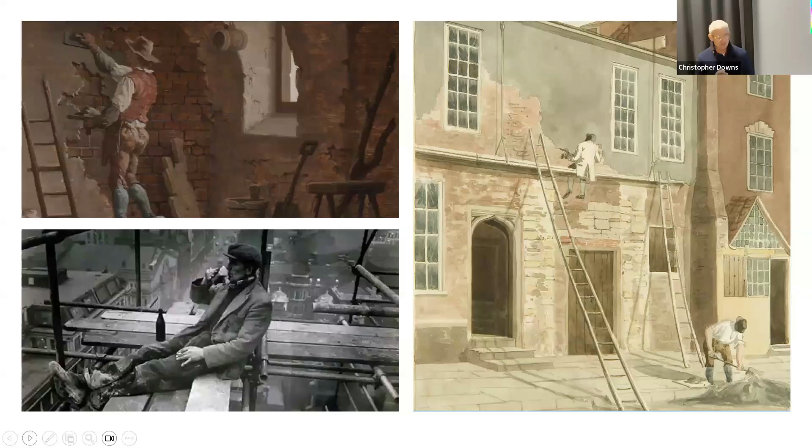Disappointingly, I've all the imagination of the field vole. I'm only interested in the facts and how the data stacks up, and this is at the core of my talk to you today. I stand before you as an academic tradesman, which for all our lack of safety, undisciplined approach, our filth, our mess, our drunkenness, and cheers by the way, we still managed to produce the mason architects of the past. Men like Palladio, John Mylne, William Adam, and the much underrated James Smith, men who understood the relationship between form and function in all its detail.

The problem is twofold. Conservation has come to mean pointing, and the process has accrued values that are unsustainable now and in a climate-changed future. And within the canon of pointing, the process is one-dimensional, a single universal style throughout the country.

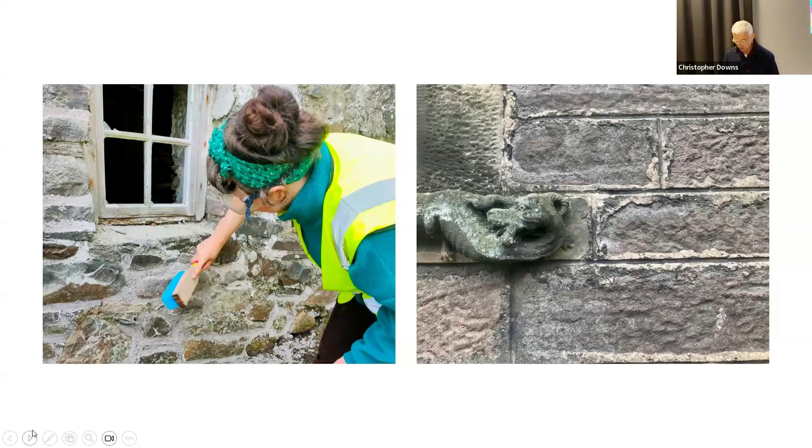Polymath Mary Somerville was a chemist, astronomer, and core figure in the Scottish Enlightenment. She's been described as certainly the most extraordinary woman in Europe, a mathematician of the very, very first rank. Her book, The Mechanism of the Heavens, was the set text for undergraduates at Cambridge, and her work on the connection of the physical sciences was only surpassed by Darwin's Origin of Species, and her efforts translating algebra into common language remains a hallmark of mathematical dissection.

Florence Nightingale is best remembered for her pioneering nursing work in the Crimean War. She was able to achieve this with her understanding of training, sanitary care, and crucially, statistics. With the use of data visualization and the polar area diagram, she was able to demonstrate that severe trauma did not inevitably lead to death, and the concept of professional nursing was the lasting outcome.

Both women used empirical observations to develop methodologies that in turn tested a hypothesis. They processed data, and the results confirmed or rejected the hypothesis. Only then could a conclusion be established. Once the results were scrutinized by a wider community, change was initiated.

The language of Ruskin and the SPAB plays a part in restraining the heritage industry from analysis, because it's an attractive outsourcing of the critical acumen of a comfortable and frankly lazy audience. In The Stones of Venice, Ruskin uses the term exquisite 24 times, while in The Seven Lamps, precious is similarly overworked. The language of heritage is directed at a particular social and economic group who are articulate and know how to generate support. So, for example, 'this darling little jewel of a building must be saved for the nation' will turn the hearts of many, and they can do so without defining who that nation is. It certainly isn't my family.

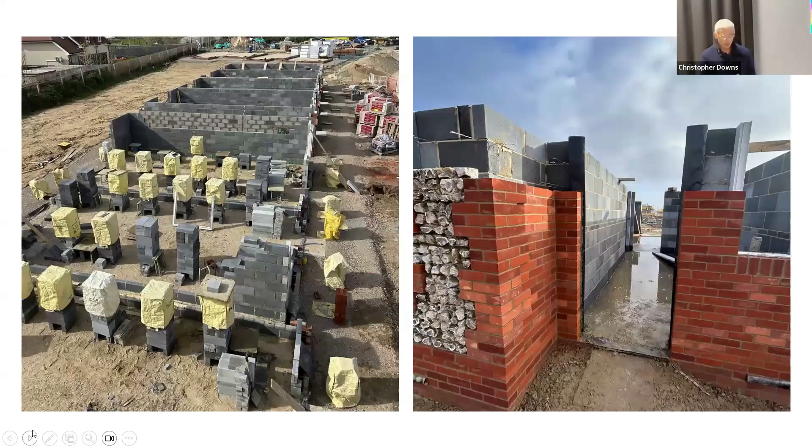This well-ordered contemporary building site presents the bricklayers and their work in a highly professional way. The unspoken truth of knowing how to get things done efficiently and well has intangible heritage writ large. They are bricklayers, not heritage bricklayers, lime plasterers, or building conservators. Adding such pronouns and post-nominals adds 30% to the cost and switches hard hats and boots for berets and cravats.

If you can't build a house from footings to DPC and from there to eaves and gable, and do it with alacrity, how can you be expected to understand the role of brickwork at Hampton Court? The transition in practice these lads and lasses would need to work in lime is tiny. The transition for many working in the heritage industry to the coherence of this site would be insurmountable.

The language of heritage portrays conservation as an art, but in reality it's professional building work, or at least it should be. My friend Peter Berman makes an interesting point: Ruskin is more read about than read, and the heritage industry just soaks up the highlights and spits them back out, waiting for the applause.

In The Seven Lamps, Ruskin is forthright: the true colours of architecture are those of natural stone. This doesn't actually stand up to scrutiny. Surely the true colours of architecture are whatever cultural, political, religious and environmental constraints there are at any given time.

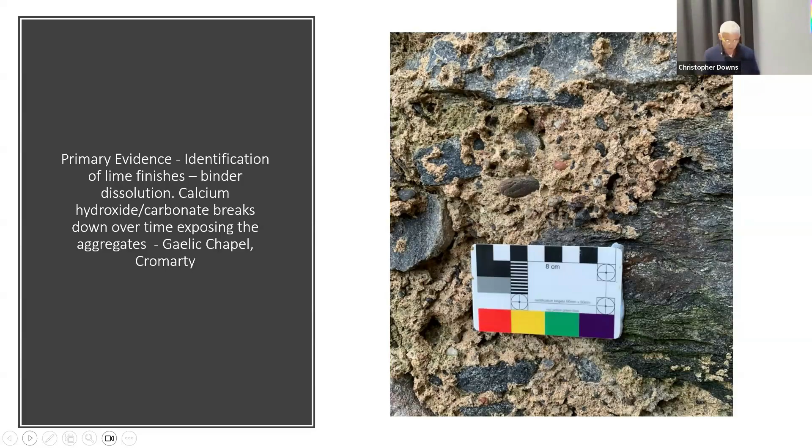The physical evidence was divided into two groups, primary and secondary. In more detail, we looked at mortar colour. We looked at binder aggregate dissolution, meaning that the binder dissolves away from the aggregate, and the mortar friability, how well it crushed between our fingers. We looked at lime inclusions, those are the little white dots you can see in the mortar.

I want to turn to site selection and the impact of unforeseen observations. So let's return to St Clement's. A planned inspection, following a desk-based analysis with compelling results. So far, so good. More compelling, however, are previously unrecorded buildings en route.

So the bulk of the entries for the study aren't the planned observations at all, but the unforeseen. Let's not underestimate the value of drive-by archaeology. In this case, perched on a hillside, isolated and seen at a distance. By stopping and snooping, one can soon develop a more meaningful metric. The inclusion of unforeseen observations changed the study from formal, planned, localized investigation to large-scale, nationwide randomized survey.

I'm trying to highlight that there is no bias in the survey. We didn't focus on specific areas with prior knowledge, so I can't stress how important unforeseen observations are, but it was significant how few of the planned observations described finish in the listing, scheduling, or CANMORE descriptions. The frightening thing is that the survey was easy. The question for me is, why has nobody looked?

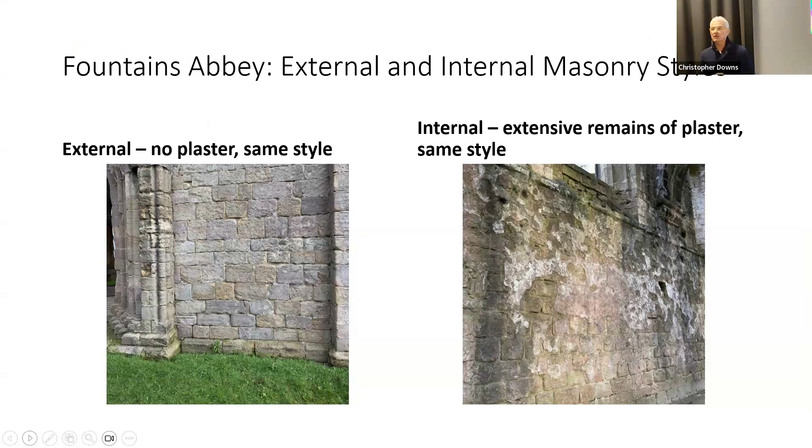But with closer scrutiny, that's a position which is increasingly difficult to substantiate. Once we understand the principles of traditional building practice and how and where to look for evidence, then we can apply the logic of backward induction. Can we then begin to reimagine not just plastered surfaces, but a polychromatic Scotland when Catholicism dominated the religious and secular world, now applied to the exterior of buildings?

Let's turn to the results of the survey. The evidence for much larger aggregates than we are currently using was compelling, but early examples of limewash fragmentary. The other crucial outcome of the survey was the identification of a relationship between wall building and finishing during construction, meaning the masonry was coated while it was being built rather than waiting till the structure was complete.

The process has implications for the robustness of finishes by creating the perfect conditions in which carbonation can take place. It also applies to the curing of hydraulic mortars. A relative humidity of between 40 and 80% over time. What is significant is the strength of the mortar at the joints and demonstrated by its long-term survival.

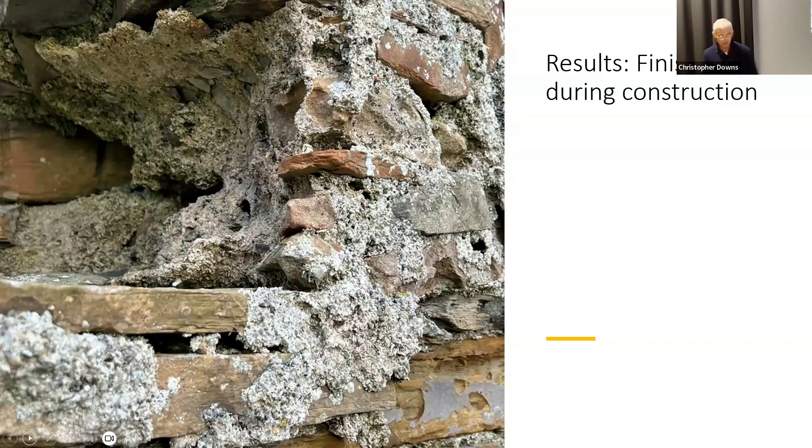But it also gives us an insight into the intangible heritage of masonry walling, a building process that was understood to be covered from the point of construction, hence William Adam's term for rubble work as rough work, meaning well built but intended to be obscured, much as roughing out timber work might be described, and my thanks to William Kay for that reference. Here you can see the relationship between bedding stone and finishing, where there is no separation between the two, and by that I mean there is no drying or carbonation front.

We identified several key features. Early harl was thick and applied as a single coat. There is some evidence for thinner lined out plasters also applied as a single coat. Floss Castle and Newhailes House, that's the building we saw earlier, spring to mind. At no point did we identify the process of harl or plaster applied as a multi-coat system.

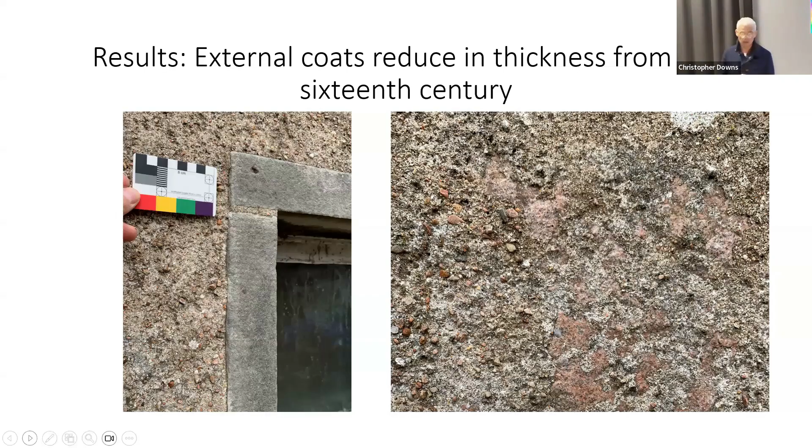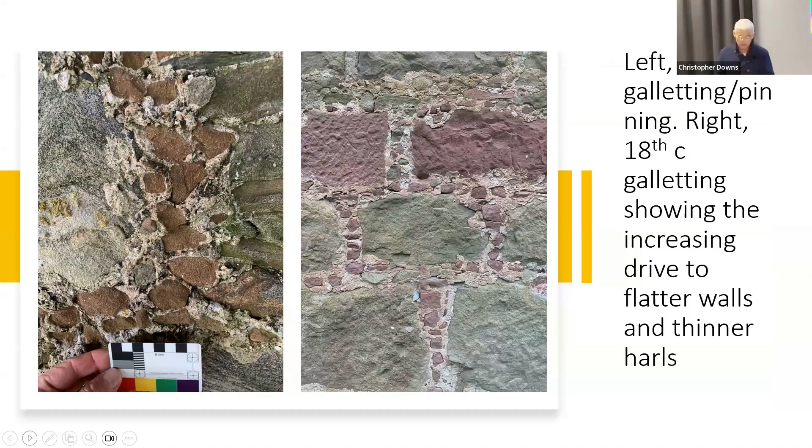By the early 18th century, harls in lowland and central belt areas reduced in thickness, and here you can see the raised margin. The harl sitting below the front face of the margin, so the shadow is cast by the margin and onto the harl and not the other way around. This was achieved by an increased refinement in pinning, galleting and snecking throughout the 17th and 18th century. Procedures that add robustness to the structure by helping resist torsion and increase compression, particularly in the perp joints, which don't have the same constant load as the horizontals.

It is my view, as a tradesman, that much of the vitriol and virtue signalling about binder type is superseded by the importance of packing the bejesus out of the joint. If we look at the timeline, we can see the wider impact this had on coat thickness. The depth of finish in the early examples is due to wear.

The reduction in coat thickness in the 16th and 17th centuries is relative to the refinement in Renaissance architecture when tower house building peaks. Coat thickness levels off during the 18th and 19th centuries and declines thereafter, which corresponds with the reduction in wall width in the same period. So, for clarity, the evidence tells us that as walls diminish in thickness, there is a corresponding diminution in the thickness of coats.

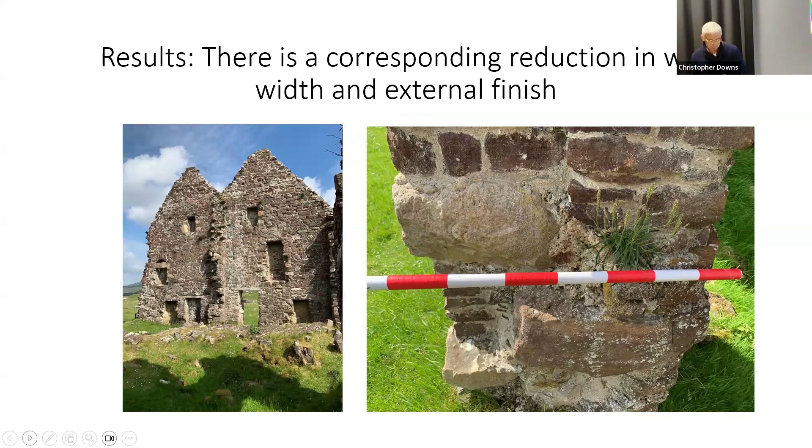But there's a secondary reduction in wall width in the area below the sill in domestic architecture, and it's worth bringing together the reasons why this happens. By the 17th century, neoclassicism was firmly established in tandem with the landscape garden. The Little Ice Age made the garden less accessible in northern Britain. However, the combined technologies of crown glass and the sliding sash window meant that the garden could be experienced from the interior of the building. This is only possible if the space is created within the window area to accommodate the mantua gown.

Again, to be clear, the evidence tells us that as lime coats become thinner, there is a reduction in wall width and a further diminution below the window in a residential building of the long 18th century. Finally, we identified that the use of limewash seems to peak in the 19th century and decline thereafter by a combination of factors, including no longer fashionable and removal. The poor representation of limewash in the earlier examples is likely to be removal in times of religious strife and wear bias. We simply cannot dismiss wear bias.

But can we begin to think about the anthropology of finishes? Because the data anomaly is at odds with the pictorial evidence from much of Europe, where plaster, colour wash, sgraffito are commonplace. It's significant that lime wash was used in strategic areas where the focus was at street level, and more specifically around doors and windows, a position substantiated by archive images.

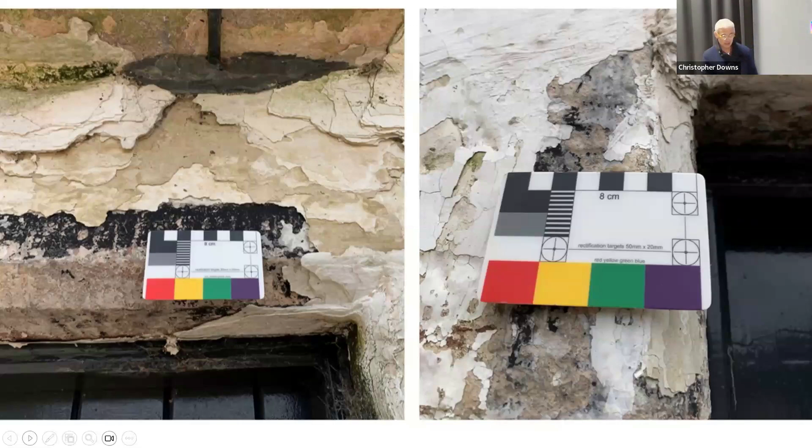The on-site archaeology showed the cyclical nature of rewashing, with multiple coats applied to cut details, folding around the chamfered margins and roll mouldings and into the window frames, leaving us with a sense of plaster and limewash used to manage external and internal environments by a process sometimes called hygral buffering, a process directly related to what my pal Robyn Pender calls thermal physiology.

Anyone who missed Robyn's irritatingly brilliant talk last Saturday should seek it out. Her central points being that in the past we were better at managing our internal environments to the betterment of personal physical comfort and well-being. You begin to get a better understanding of the cruciality of triangulated evidence, a methodology we have not previously been good at.

However, by the late 18th century, particularly in the central belt and urban areas, the dominant expression of architecture is bare stone. And thereafter, we see the arrival of rubble mania and what we now think of as pointing. We identified 16 different pointing styles, and several factors need to be considered. Firstly, the overwhelming commonality was formality achieved by lining out by pressing into the joint with a purpose-made tool while the mortar was green. Sometimes white lining was added. It might also mean dotting the joints with small shims of slate to create a black definition rather than white.

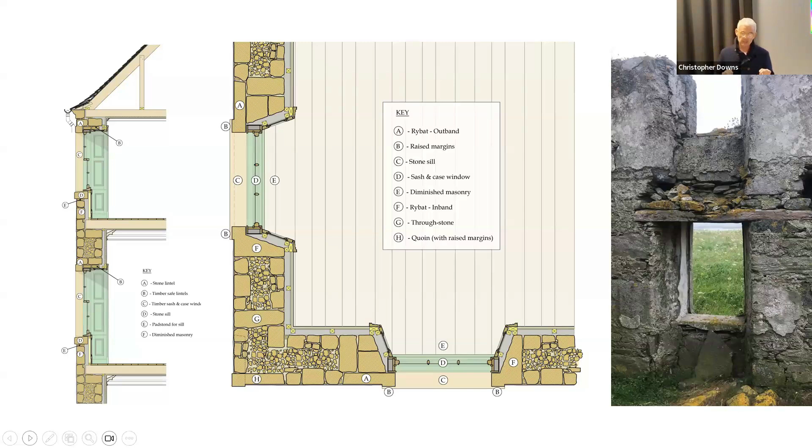Understanding how all the different elements of a building come together is crucial. So, by putting the elevations, sections, and plan together, we can understand wall morphology as a series of substantial piers, triangulated at the corners, and linked by insubstantial ties. That's the narrow bit underneath the windows. Externally, there are stone lintels with timber supports behind them, onto which the masonry is placed. This houses the floor joists.

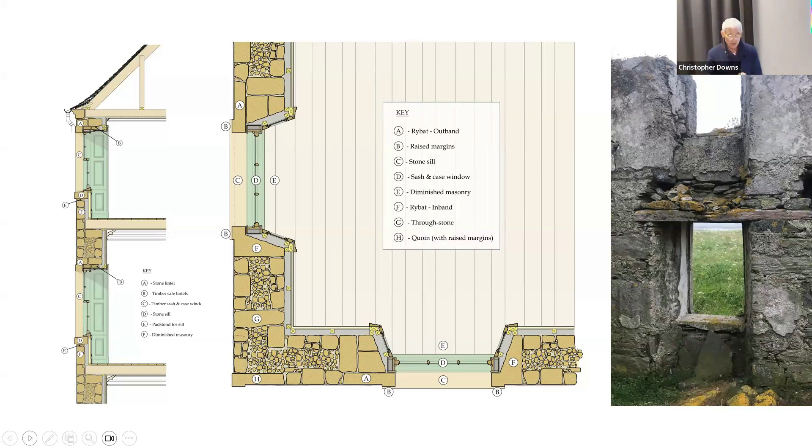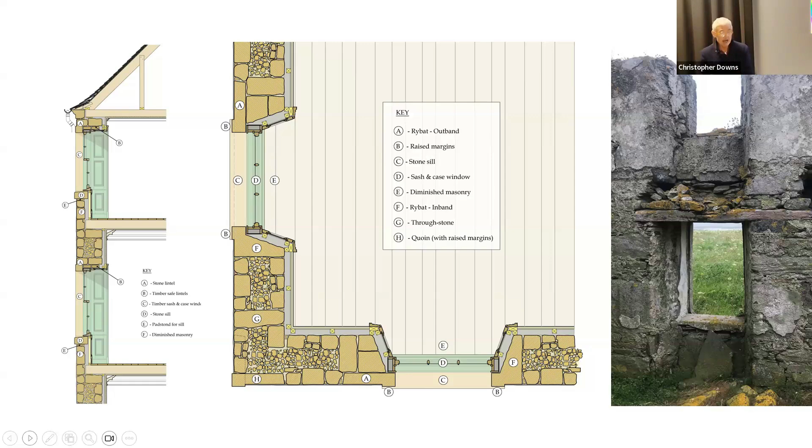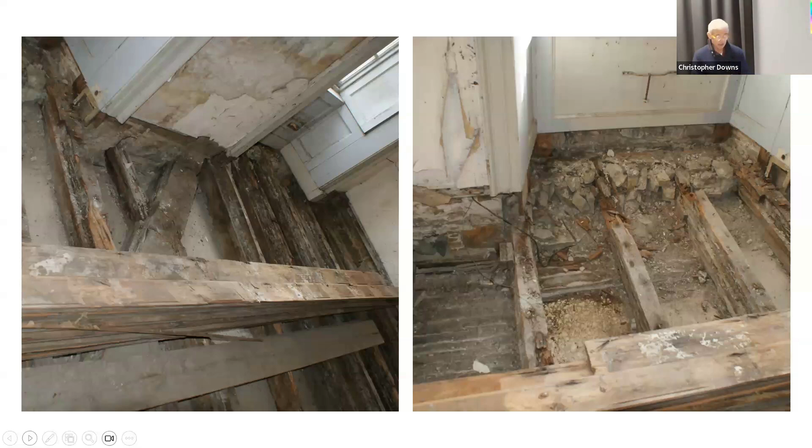It's a relationship that's dependent on everything being absolutely dry, which is unlikely because the area is prone to cracking. And this pattern of cracking from top to bottom was near universal in those residential buildings throughout the long 18th century. The consequence of that vulnerability in driving rain is inundation, timber decay, and exponential vulnerability of the structure because the timber is no longer working in tandem with the masonry.

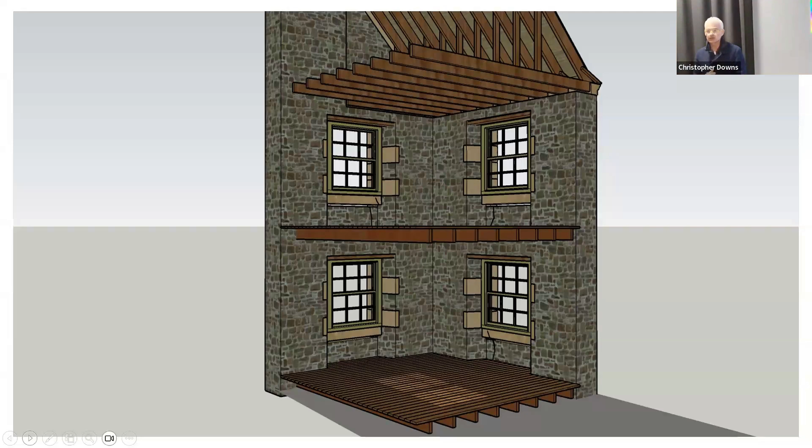William Adam recognised this vulnerability and insisted that floor joist ends were tarred before insertion. And again, my thanks to William Kay for that reference. The isometric helps illustrate how integral timber is in tying the structure together. The timber-safe lintels, the floor joists, and the floorboards act in unison. And this allows you to see all the component parts together, and you can see the cracking from ground level meandering up around the windows, up to the crow step and eaves.

Now let's think about the sill. This had to be placed accurately because the window margins are located on it. The margins have incredibly fine joints, so there's very little tolerance for moving them to keep them plumb.

The trend noted was to keep the masonry under the sill low and place the sill on padstones, filling the panel below retrospectively. The horizontal sill joint and the panel of rough work is never in compression because it's been slotted in from the front rather than walled from above. In addition, the wall is a single skin with a direct link to the external environment.

In this example, you can see the very fine crack just below the sill. It's a crack that's developed in a wall width of no more than 200 millimeters and formed by mortar shrinkage and the stresses and strains of the structure we noted earlier. For clarity, this would not conform to the British standard on solid wall masonry.

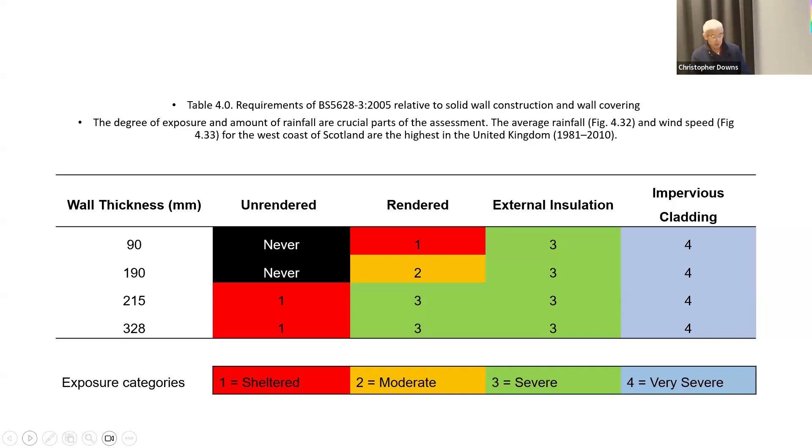Masonry of this width, with this degree of exposure, without a coating, would fail to meet the requirements of BS 5628 in new work. So why we think traditional masonry can cope is puzzling. Moreover, not all walls of the same width are equal. We've considered the ideal of a wall as a composite unit, but it's an ideal which is rarely met because movement dislocates the inner and outer leaf from the core into three separate units.

The earth lime core in this example has largely washed away. What remains is a parapet of single width masonry, a cornice, and a tripartite wall system with thin masonry skins and an open void core. This is unlikely to remain stable and resilient in its bare stone state, irrespective of lime pointing in adverse conditions.

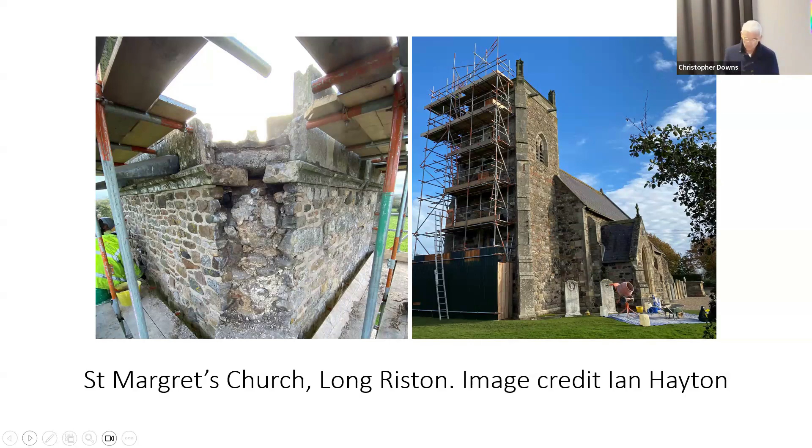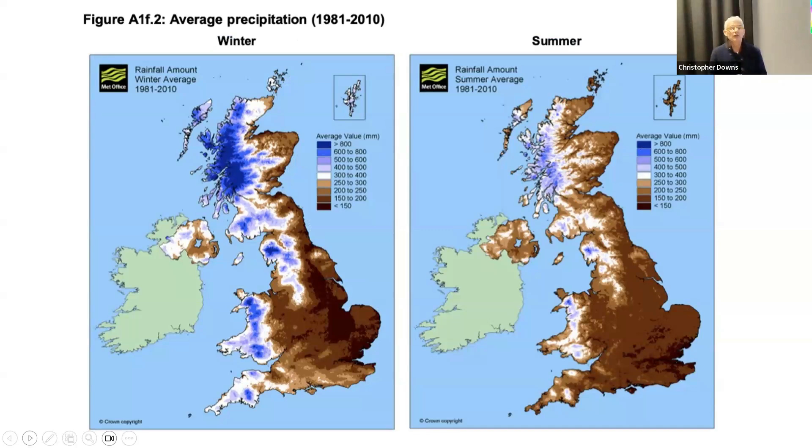Now let's talk about climate. These are Met Office rainfall distribution maps of the UK, and you can see just how wet the west and northwest is. It's also the windiest, with gusting wind speeds during storms Aiden and Ciara of up to 70 miles an hour. I want to now look at proof of concept and applied science.

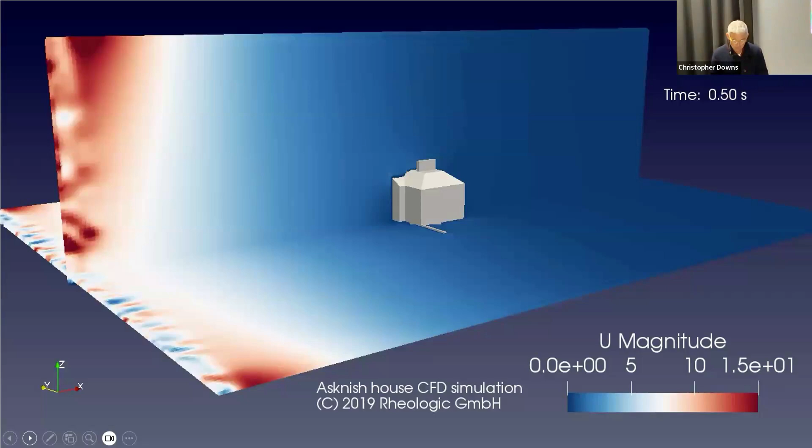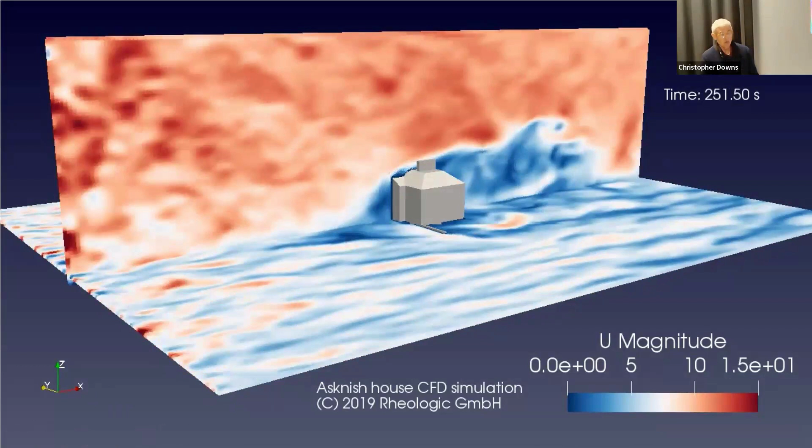Storm conditions with low air pressure are accompanied by wind and rain. The wind that flows around a building is described as dynamic pressure. This is a very general computational fluid dynamic illustration, the blue representing low pressure. You can see that there is a difference in pressure between the front, rear, and sides of the building. But there's also a difference between the external pressure on the windward elevation and the interior, the blue representing low pressure.

Let's give a bit more clarity to that general picture. At the external wall face, the velocity of wind and its kinetic energy is curtailed abruptly, creating high pressure. We know all buildings aren't airtight and that there are cracks, often tiny, on all elevations. On the windward side, there can be air-water infiltration. If the sum of infiltrating air is less than the sum of exfiltrating air on all the other elevations and the roof combined, then there will be an internal pressure difference.

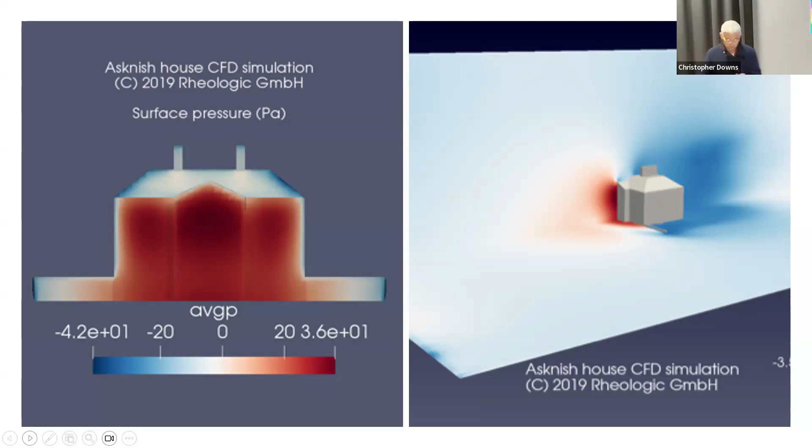In conditions of wind-driven rain, water enters the building envelope via three agencies: capillarity, driving rain through wide gaps, and pressure difference through tiny cracks. Pressure difference being the corollary of wind. Hypothesis: pressure differences combined with structural deformation can be negated by complete lime coats.

We built an airtight chamber and used a dust extractor to replicate the pressure variables expected in storm conditions. The testing regime used was the ASTM standard, which measures air leakage in new buildings at 75 pascals. The baseline for this experiment was 70 pascals pressure difference. The irrigation system delivering water equal to an exceptional but not unheard of event based on Met Office figures. So what we're doing is we're pulling air out of that chamber using the dust extractor to replicate that internal pressure difference.

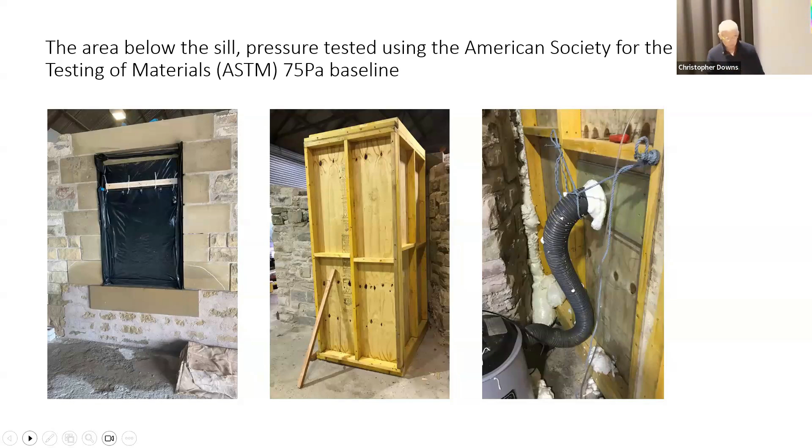Pressure difference makes a significant impact when a wall has no surface treatment and where there are very small cracks. In this, pressure differences from 0 to 70 pascals. With no pressure difference, the rate of water entering the chamber was 125 millilitres per minute. At 70 pascals, that increased to 375.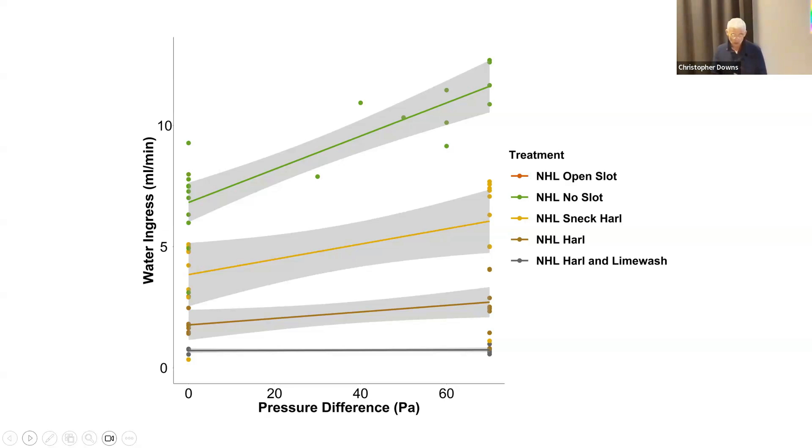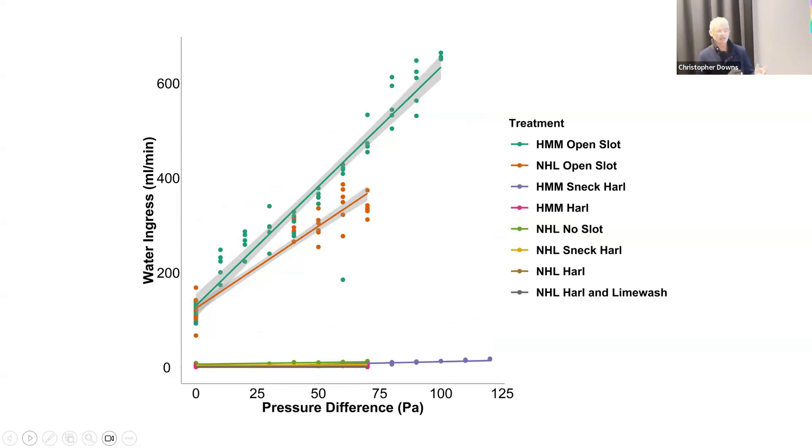When we ratcheted up the pressure difference beyond the 70 pascal baseline, there was an exponential increase in inundation. In this case, we compared the difference between high calcium and hydraulic mortars. The most significant outcome here is the amount of water entering the chamber in the high calcium mortar scenario. This can be accounted for by the amount of shrinkage within the mortar after 3 and 6 months.

In contrast, once the high calcium harl had been lime washed, no water entered the chamber, hence there's no trend line. The difference between the effectiveness of the two mortar types is very small. The difference between coated and not coated is colossal.

Most would regard New Lanark as a success. It's sanctioned at the highest level, though there is no substantiating evidence. But it does generate income, so income trumps authenticity, with a price tag of stone decay and ultimately loss of the asset. And therein lies the problem. We keep repeating the process, knowing that it's not climate responsible, nor in this case, reflective of the Scottish Enlightenment.

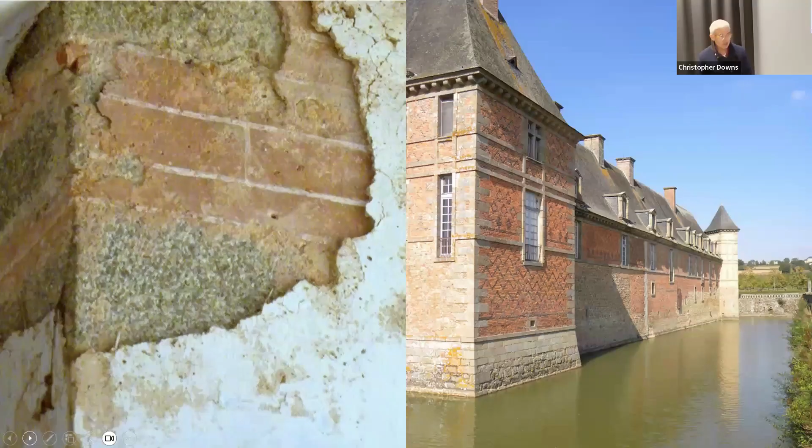Is it possible that the most urbane and learned man in the United States, who's familiar with the trompe l'oeil at Versailles, returns home and accepts the staggeringly lame brickwork as the finished object, rather than understanding it as a base onto which a polite finish could be applied? If the rough work at Poplar Forest is the architectural intent, I will eat hay from a manger with a Virginian donkey.

We have managed to export the idea of rusticity, established by proclamation, to the UNESCO ICOMOS process, and there is a price to pay for that. Buildings without resilience and the architecture of the grim dark. The loss of finishes is related to the loss of regional identity and the knowledge that resides in craft.

Despite the many critiques of Ruskin and the attempt to place it within the context of his own time, and I do have some sympathy with that, we can take him at his word. And we can do so because we remain tied to a flawed ideology that ascribes animistic values to buildings which they don't have. They're buildings, they're not sentient beings.

Conservation has become a set of interconnecting homilies that have been repeated so many times they've solidified into an acceptable narrative of doctrinal instruction, and the process is played out in a predominantly white, educated middle-class arena. If the industry, and that's what it is, isn't accessible to everybody, then it's neither relevant nor groundbreaking, and nothing changes.